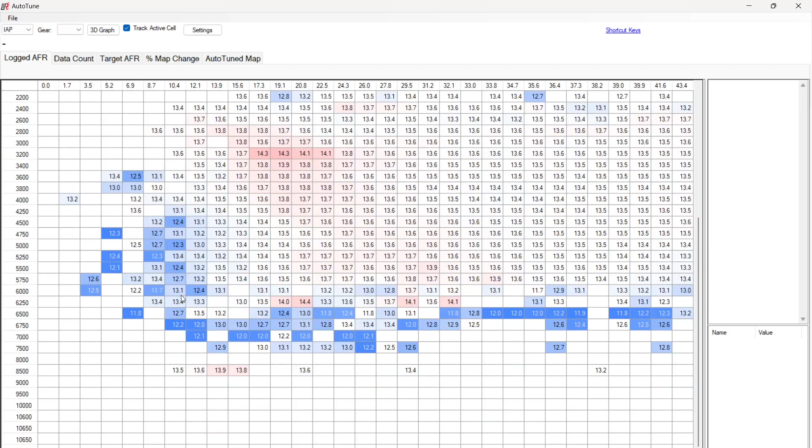That was one of the other things that prompted me to make the video, and I completely forgot about it. If I look at the percentage map change, it's doing a 9% change, 9% change, 9% change. Hang on a minute, I've got it set to a maximum of 6. So how come it's doing 9?

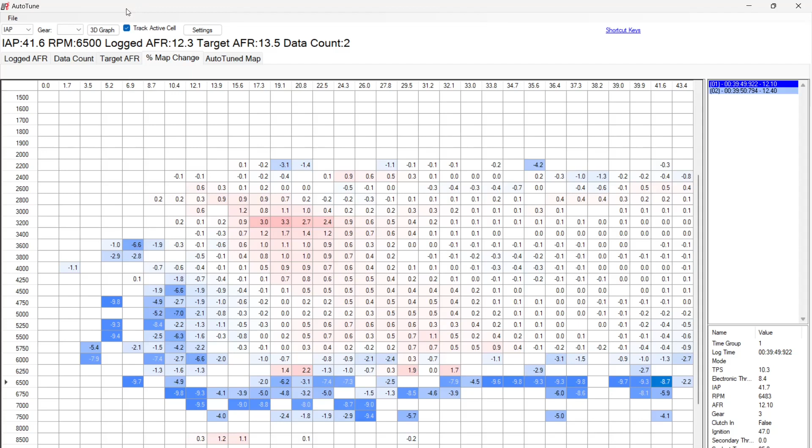That was one of the things they did, they just bodged all of the settings. So all the settings are gone. Look, neutral filter's gone, clutch in's gone. Apologies. Yeah, deceleration filter's gone too. Smoothing strength, I think I had that down at 5.

That's the thing, I have no idea what I had it at. I know I had this at 11. Let's see, can't remember what I had. Auto-tune strength, I think I had that at 70. Maximum percentage change, I had that at 6.

So yeah, I've had to go back and redo that. I had to do all the, so this one here, you've got to tell it how far away your O2 sensor is, because there's a lag between the different log records. The AFR record doesn't directly match with the record it's logged at, because it takes time for the fuel to go in, the ignition to happen, and the exhaust to actually flow down. Regardless, I had to go and put these settings back in.

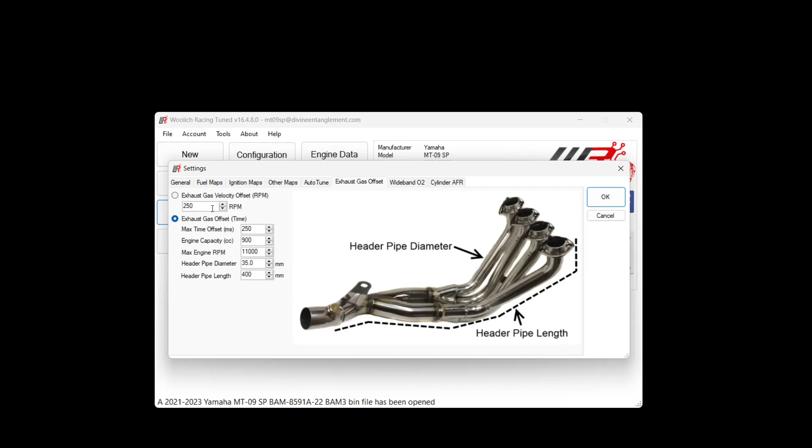Let's see, did I do that before I move on? Yes. Oh, I also did a test to see if I could get power mode in the log file, but yeah, Yamaha just didn't show it up at all.

Let's just see all of that. Don't think I have to worry about that. Oh actually, that could be handy - compare bin file, current bin file. I have to figure out how to use that. Although it is handy to see how far you get from stock, but when I really lock one in, I suppose I'll make that the base one. Anyway, I needed to set that.

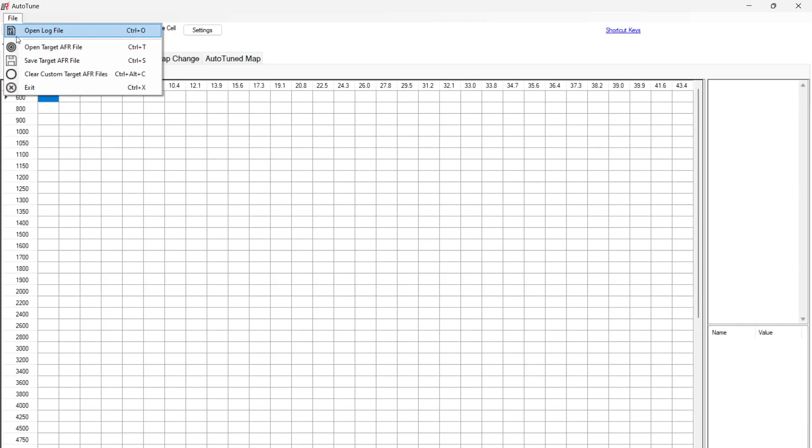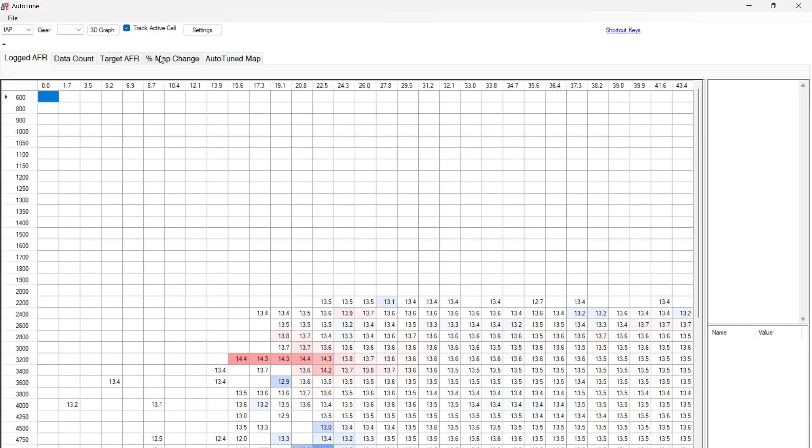Let's come back again, open the log files, and let's see. Hopefully it won't be trying to adjust it by 10%. So yeah, maximum 6%. So obviously some of those filters could have all been in the deceleration areas and whatnot.

So you've got to pay attention. If I wasn't paying attention on it updating, I wouldn't have known that the settings had been wiped. So that's something to be quite cautious of - it would have done a lot of updates that I never actually wanted applied.

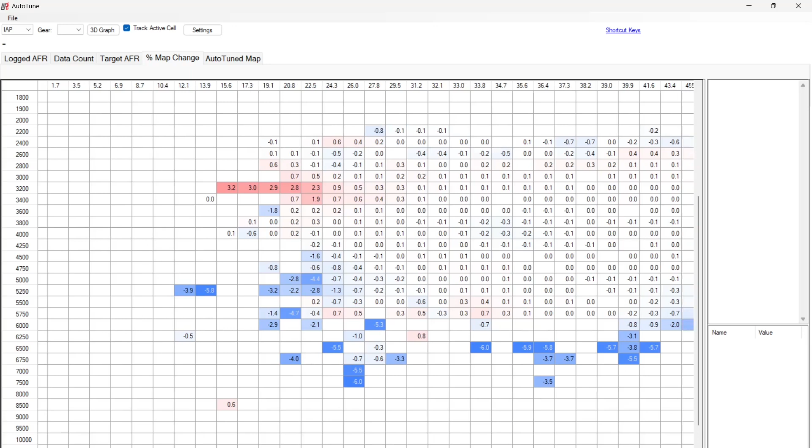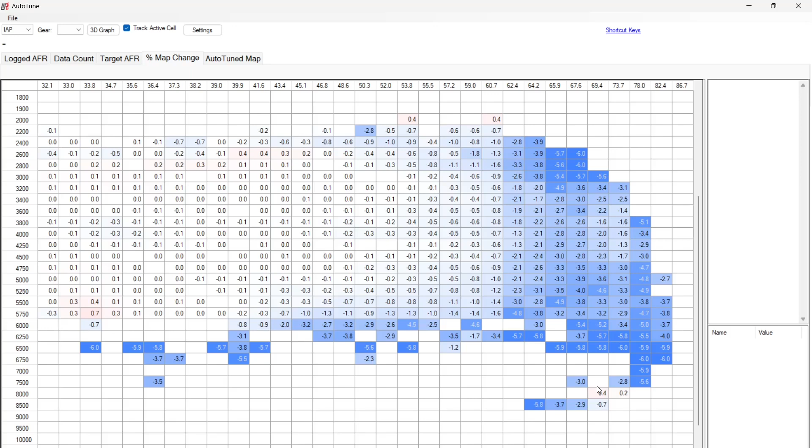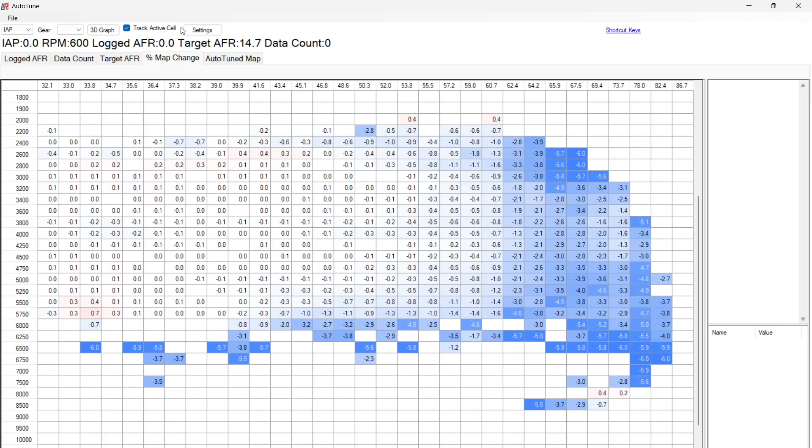And this here is extreme engine braking. Actually, I should probably - I think I'll put in another filter to take that out. So let's see, go to the Autotune map just to see what the values would be.

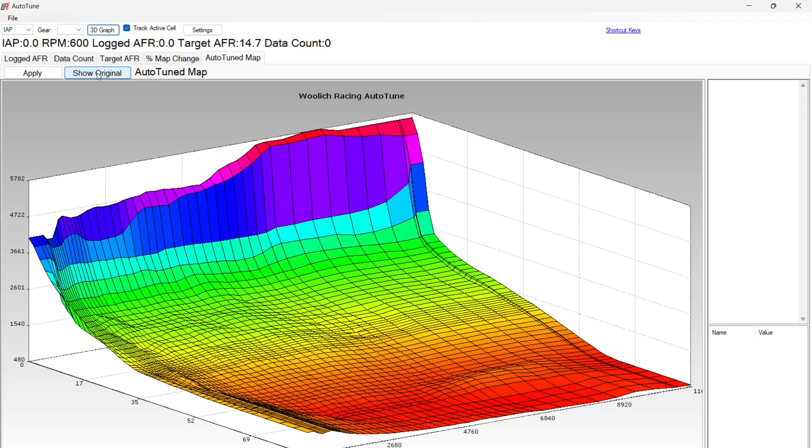So yeah, because that's a pretty dramatic change. Let's have a look at the 3D graph. So that's what it was, that's what it is. Not really comfortable with some of these changes, because that is actually leaning it out quite a lot, particularly at these higher revs. Well, not really - oh yeah, I suppose it is, relatively speaking.

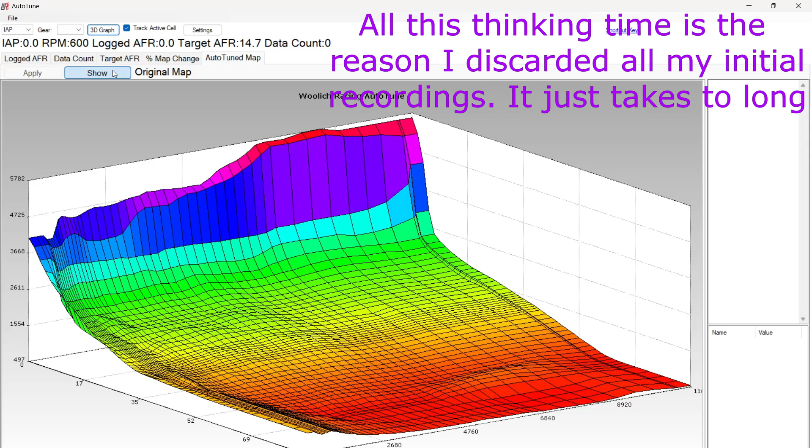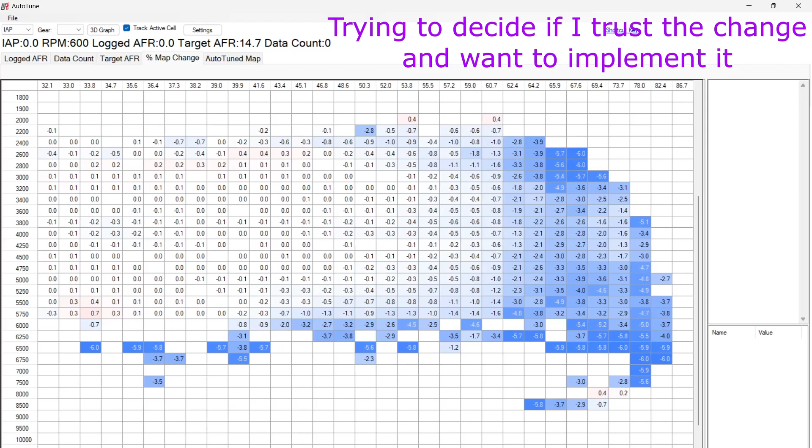Yeah, let's see. So if we come back to that, we're talking, I suppose, this area here. How many data records have we got? Not many, not many, not many.

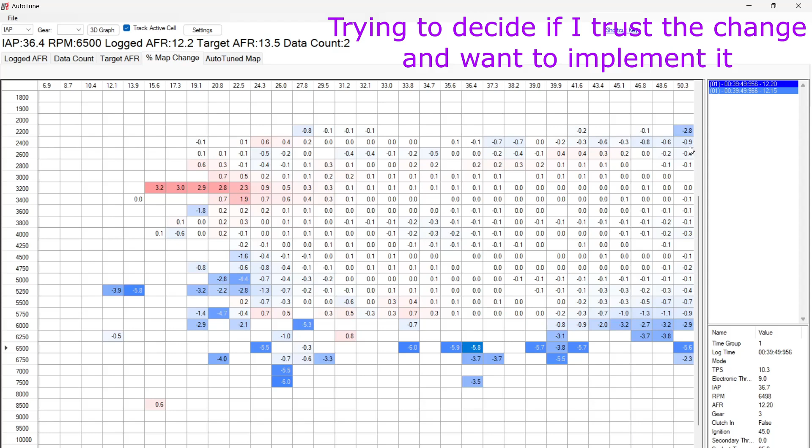I'm going to go back to the settings. I'm going to change this up, minimum cell data logs. Let's put this back to 10 - well, not back to 10, let's put it up to 10 and see what we get.

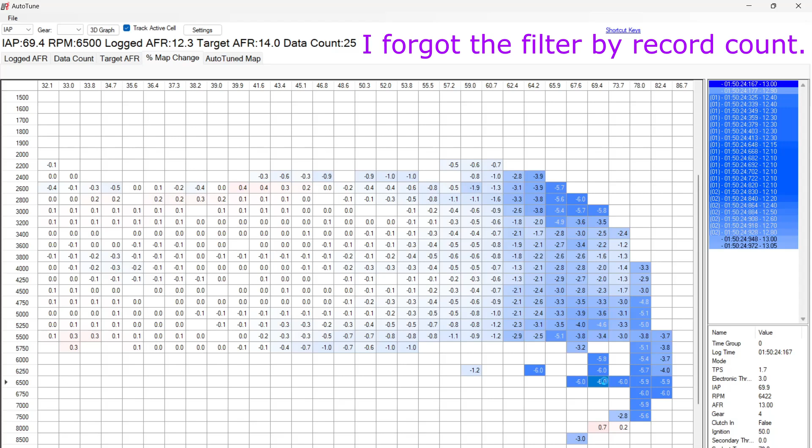And it's just completely taken them out. And that is a lot of engine braking. I won't actually mess with this. So I'll copy it up to 60.7.

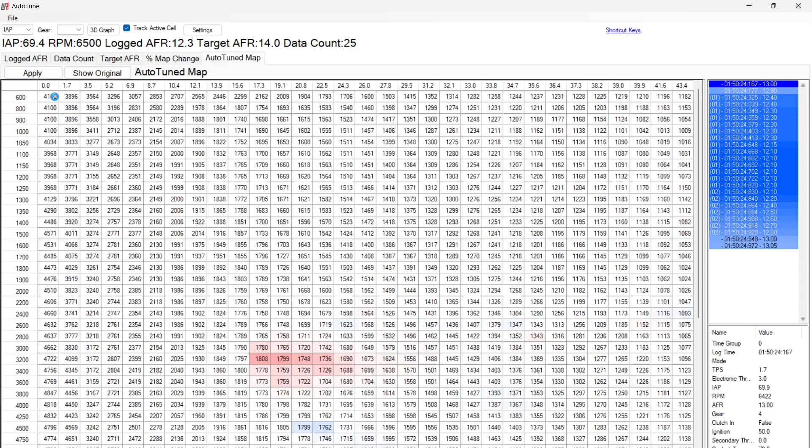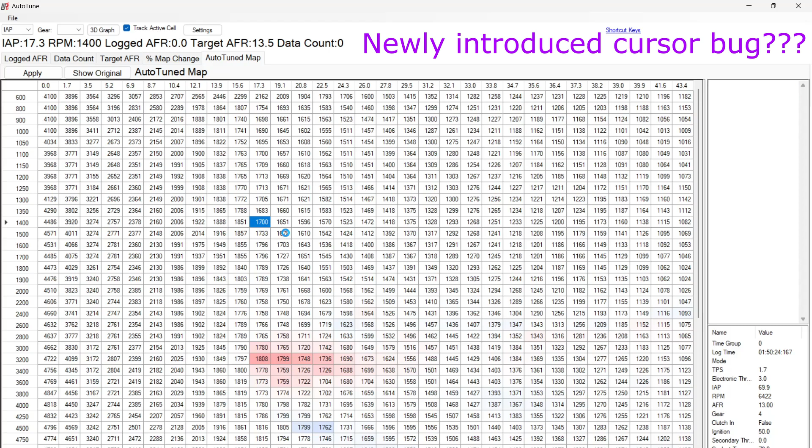So if I go this - okay, it's trying to load. Come on, hurry up. What is it trying to do? It's mixed up.

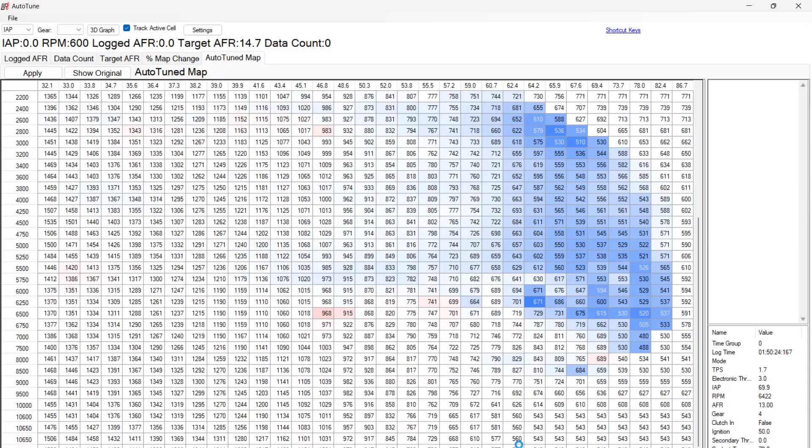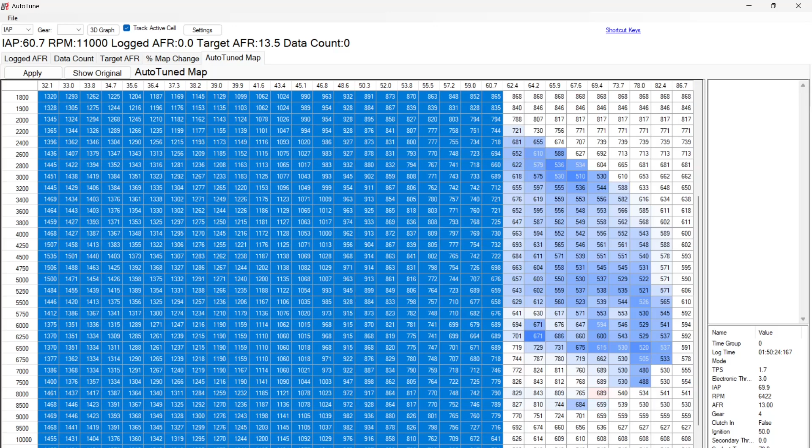Yeah, so I think I'll leave it at just there, because the other thing - I do have it set up for the popping and stuff, which would actually potentially fall into a couple of zones here, probably not down here. But regardless, here I might actually add a filtering section for that.

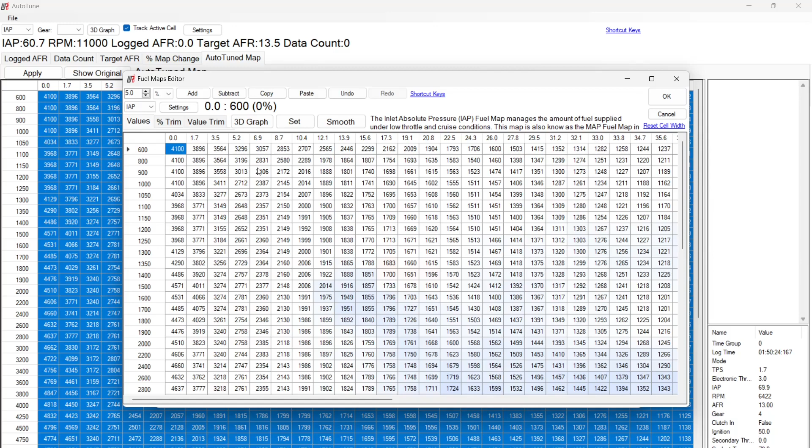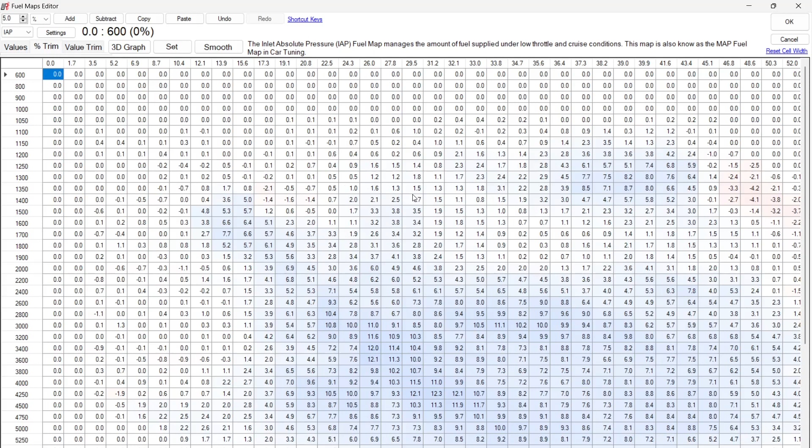Anyway, I selected this from this top corner, so that's where I'll paste it in on the fuel map. So if I go fuel map, IAP, and yeah, let's have a look at what we have overall. Is, yeah, it's not that dramatic, relatively speaking.

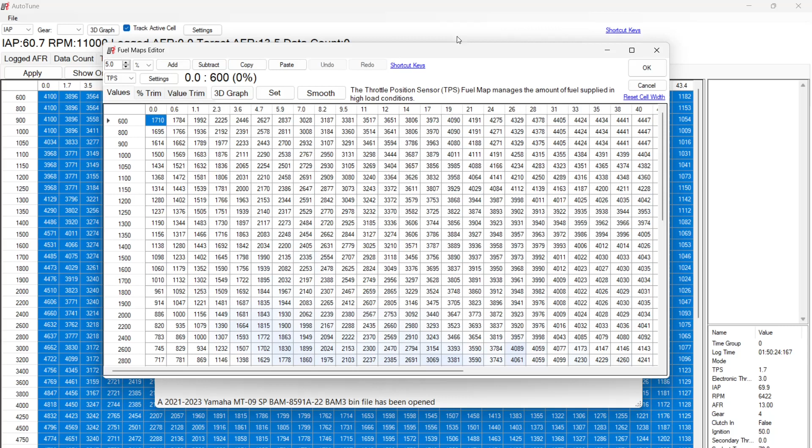So anyway, I'm going to okay that, just open it up fresh because I presume that's sort of locked in. Okay, go to TPS, over here we'll go to TPS. Okay, it's got a few records there. That's been a bit lean, so it's trying to rich it out.

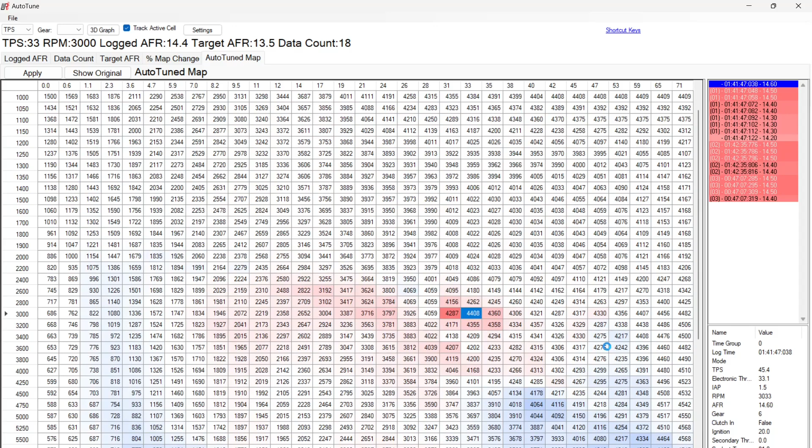Okay, just have a look at the graph and we'll see where we were. I don't know, you got to trust it. This is where it's sort of a bit quirky. And it's interesting that, yeah, some of these are actually, like this whole area here is actually going up higher. This whole area here is going up higher. Part of this maybe is just not going anywhere.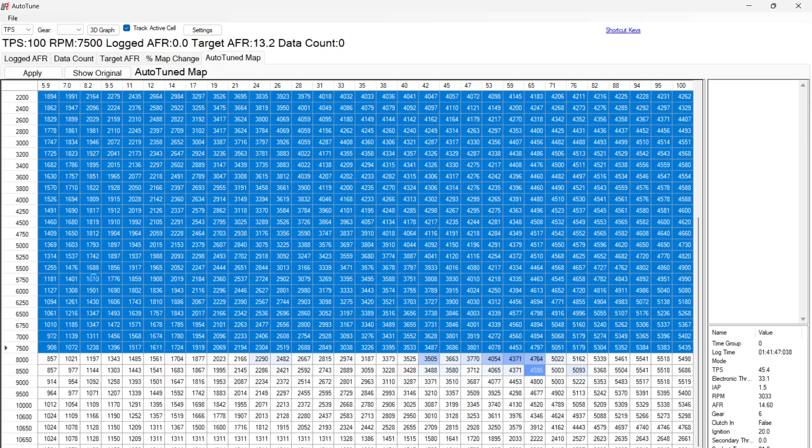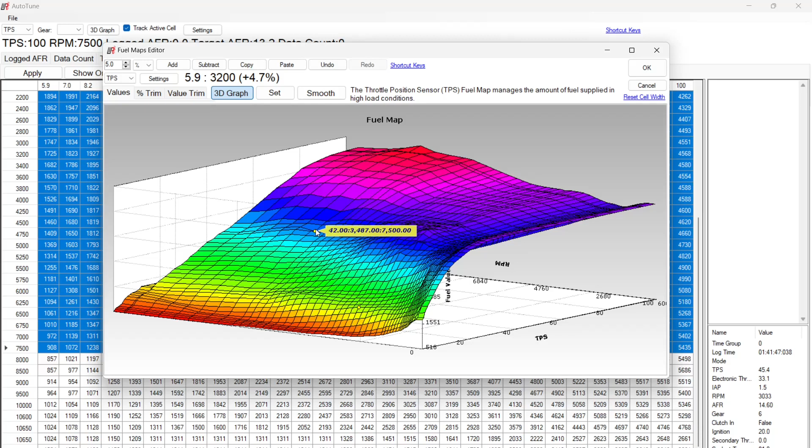Okay, so we have the fuel map. I grabbed it from the corner on TPS. Okay, let's have a look at our graph. Yeah, it does have a hole in it there. It's at 42, 7.5. So 42.

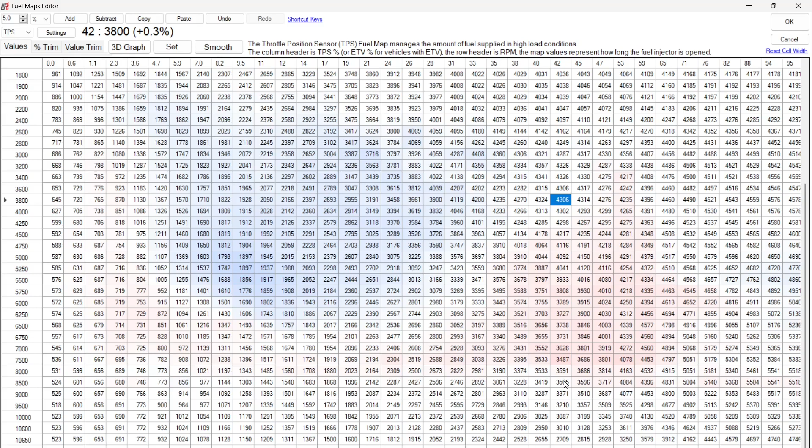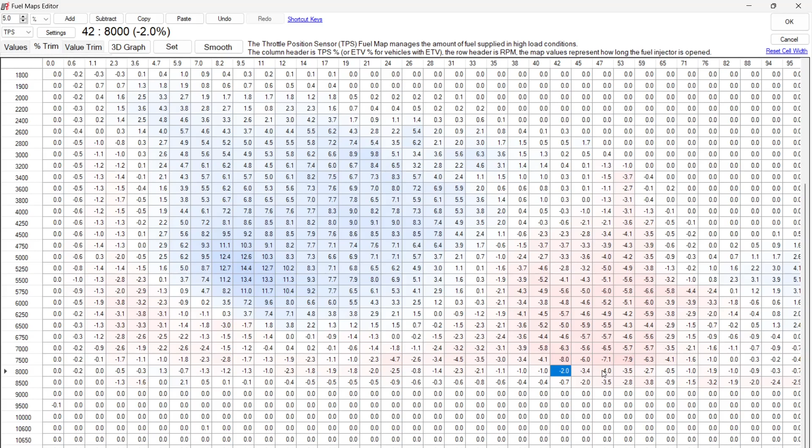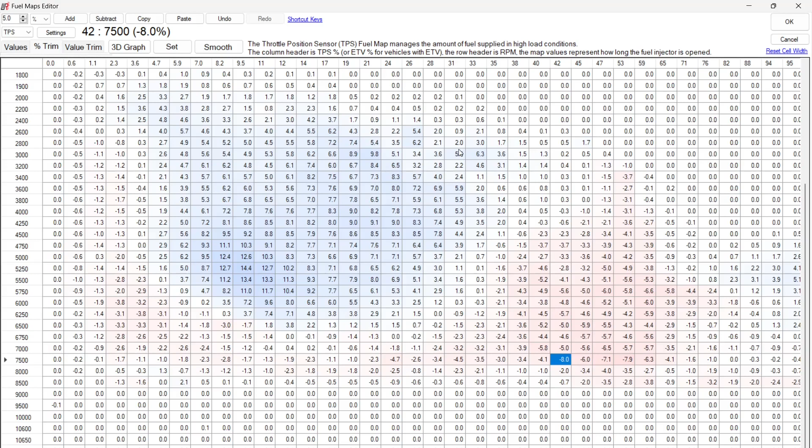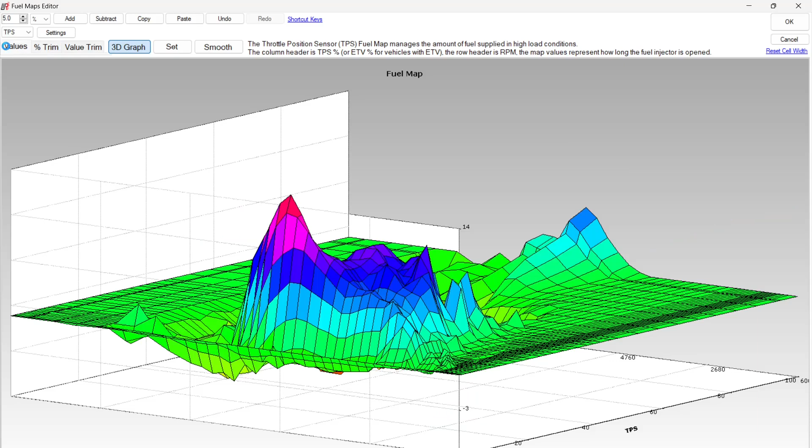Let's see what we've got percentage wise. That one. Yeah, I'm going to take that out, or at least I'll make this -5. Well, actually, set -5. I'll set this to -5. And yeah, that spot's not as bad.

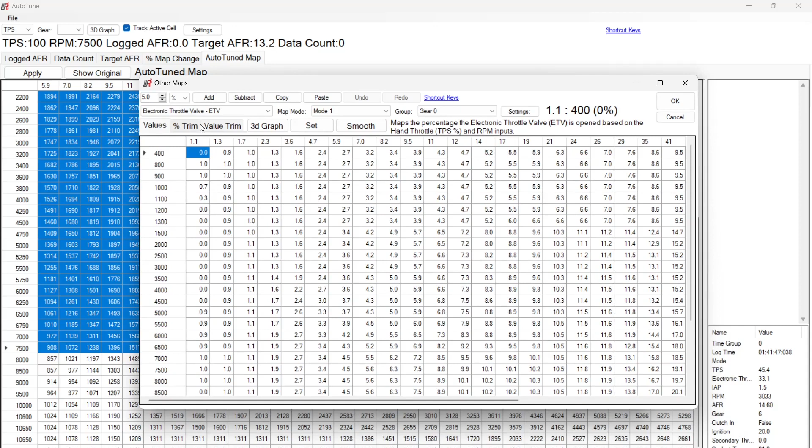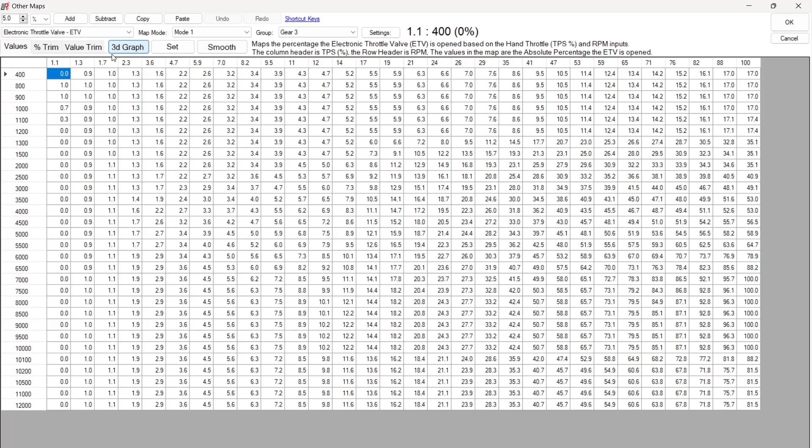Okay, another change I made was with respect to the throttle valve maps. So if we have a look at these, for mode 1, if we have a look at third, because I didn't touch this, you can see it's quite sort of very sharp. It's got its little dip there, and yeah, it's got a very sort of significant inset there.

So if I go to 4, I made a slight change on that, so I sort of smoothed it out, made it a lot smoother.

And yeah, if I go back to this one, so it's sort of, you open the, even if you crank the throttle all the way up, you say you're down here, you're sort of cruising. What do we got? We're at, you know, okay, let's say we're at, yeah, 3000 RPM, and you just crack the throttle open 100%. So you'd be down here, you crack the throttle open 100%, and it's really just going to put you here, and then you're going to wait until the revs go, and you're going to wait a bit more, and wait a bit more, and wait a bit more, and then you're going to get your rush. And it's like, what on earth are you doing? You know, this is mode 1, and it just, so this is why suddenly you get that whoosh, and everyone goes, oh, it's got so much, you don't get anything until you get to the higher revs. That's because it's not giving you any throttle until you get to 5,500 RPM.

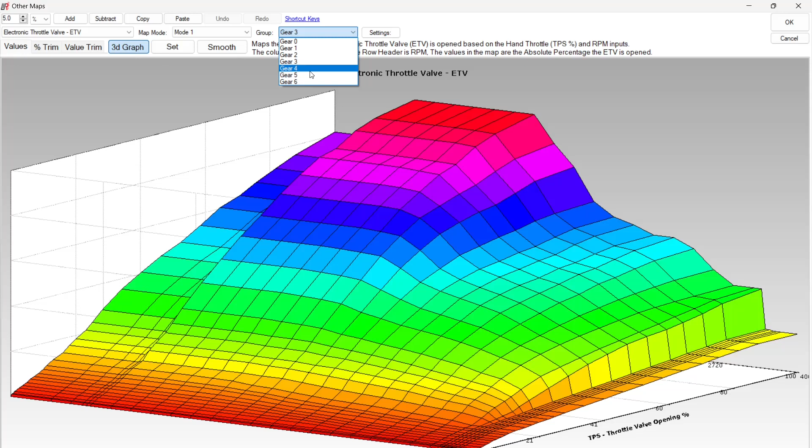So that's probably all right in the lower gears, because you know you ended up wheeling it or whatever. But in the higher gears, there's sort of no reason to be that restrictive. So for gear 4, I sort of smoothed out this bit here. Gear 5 even more so, and gear 6 I think is the same as gear 5. Oh no, gear 6 I let it just, yeah, gave a little bit more on the rev limiter. So I just backfilled this bit at the back, you can see.

But went out and riding this, yeah, it's very smooth. You crack the throttle open in 5th and 6th gear from about 80 kilometers an hour, and you just hold it wide open, and it's so much more smoother the way the power comes on. So, you know, you're not actually, the flow isn't this, and the flow isn't this.

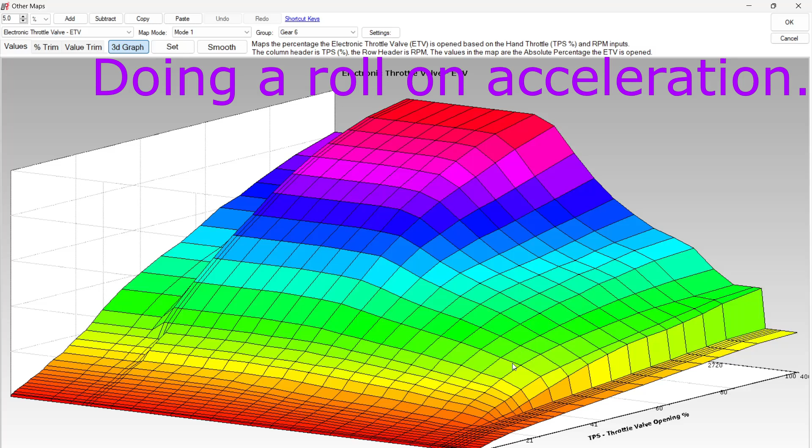It's actually the combination. The flow is this direction, because of course you are accelerating, and as you accelerate, even though you've got 100% throttle, or you sort of wind it on, this is your smoothness. As you open it up more and more and more, it'll come this way. Yes, you can crack it right open, and that just sends it all the way up here for it to go along this way. But yeah, it's not really.

Yeah, how do you put it? It is what it is. How did I do that in the Woolich stuff?

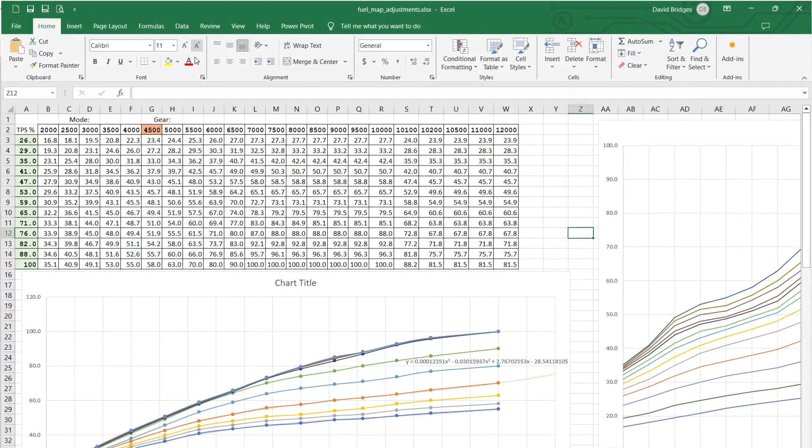Well, I didn't. So what I did do, I copied the relevant section into Excel, and I spent a very tedious amount of time graphing it, graphing it this way - two ways actually.

So one is per chart. Effectively, each of these is vertically relative to the throttle position sensor. This might be third gear, can't remember. Ultimately this one here is the 4,000 RPM band, this one here is the 6,500 RPM band. So in here, that is the equivalent of this one, 6,500. That is this flow and how smooth it is.

But the other graph is actually this one, so it's how much - that's the thing. I've graphed both of these axes. This one here is coming from low throttle position to high throttle position, and this one here is going from low revs to high revs.

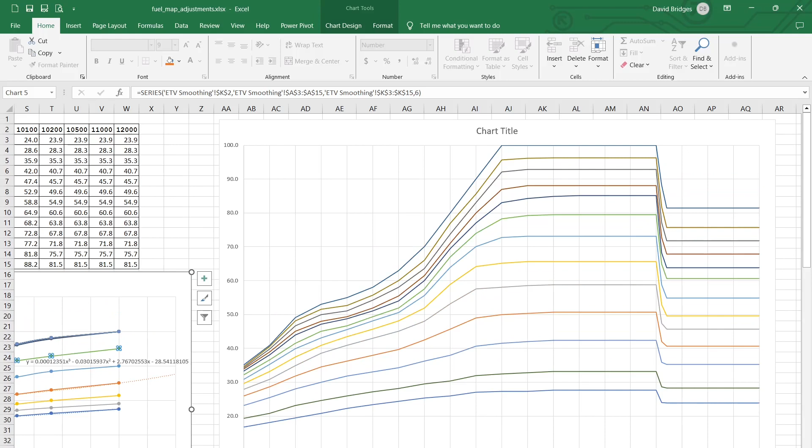What I was doing was basically making - oh, previously the original ones were just very much chopped in here and then went up, and it was really ragged. So I just made this a lot smoother. Of course, this is fourth gear.

So these are the adjustments to fourth gear, and I smoothed this out too. I put in the trend line, worked out the formula for it, just so I could get a feel for what I was looking at.

And came in and made sure that any sort of dips that were in it this way were removed. Came here, reduced this quite a lot, and at the end came out with a nice balanced and much smoother result, which of course you can see here.

If you go from that to that, this one's very sharp angled, and it's got this dip in it here at 10,000 RPM before it gives you full throttle. So yeah, that's a big part of it.

Now, but of course you come to this, and it's a lot smoother in each direction. And as per usual, I'm not mucking around with how it is down here.

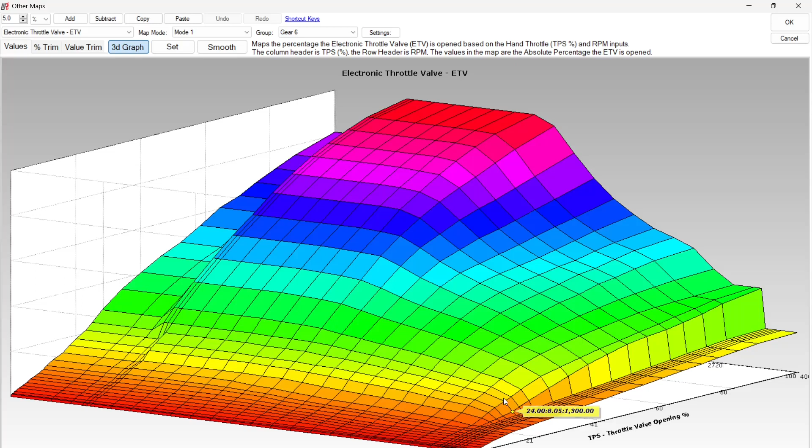Now another thing is my O2 sensor delete didn't quite work as well as I wanted it to. I think the trick is going to be when I pull the wideband O2 sensor out and stick the stock one back in. I've got some plugs on order, some connectors on order, so I'll wire up one where I can hook up a meter to the output and actually look at what the stock O2 sensor is outputting, so I can generate a more consistent input that the ECU is happy with.

I took a wild guess at the half voltage mark and aimed for that, but I'm not quite sure that was necessarily correct. And since it's passive components, I might have to put some active components in or make it adjustable. When I say active, I mean stick a voltage regulator in there, so I've got a controlled value that I then divide rather than just dividing by the battery alternator voltage, which can fluctuate.

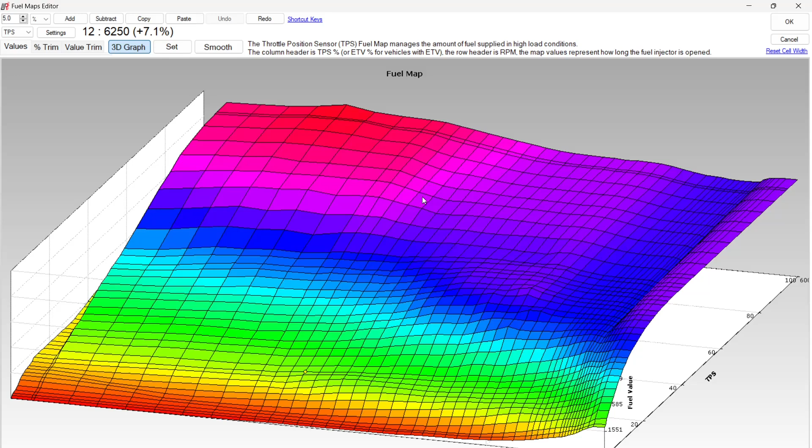The other thing too is that these are the first few maps I've done after identifying the bug in the ETV. The first logs I applied in the last video were actually just from basically freeway riding, so there wasn't much there - just fifth and sixth gear, cruising at highway speeds. Today's ones were more of the first logs that actually involved twisties riding.

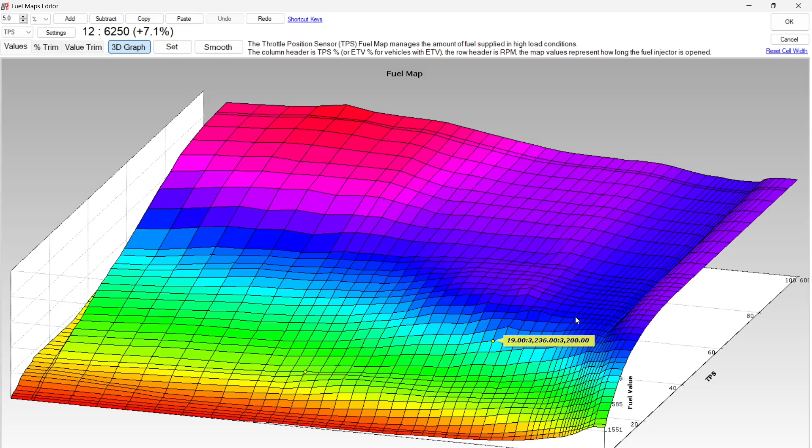I'll have to collect a few more of those and hopefully flesh that out. Anyway, that's it, and I'll close all this up and save that file off.

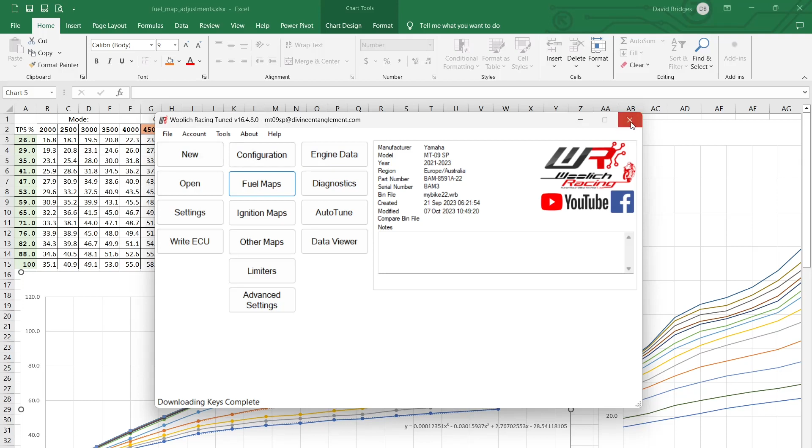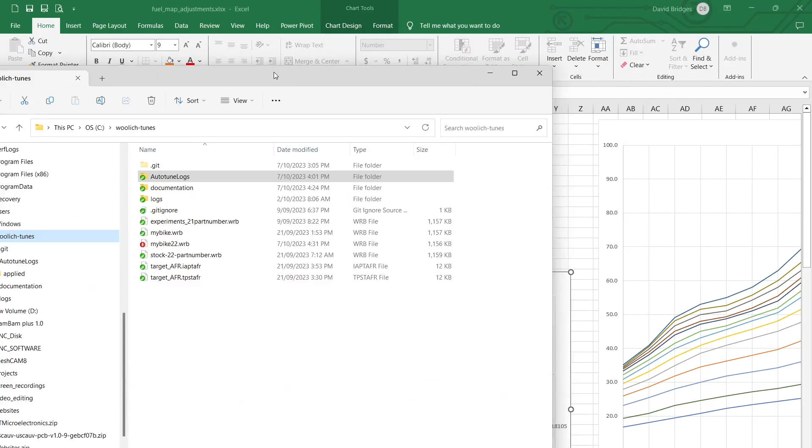Yes, I want to save it, so I'm going to do that. Got it, now we want to commit it.

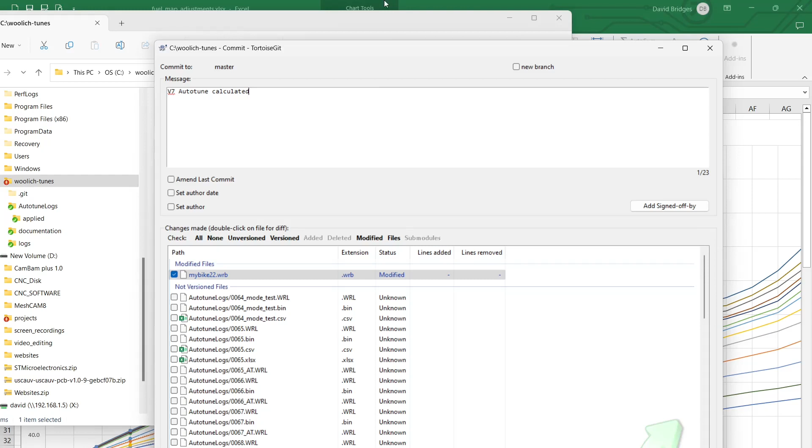So V7 auto-tune calculated, and we are right to go.

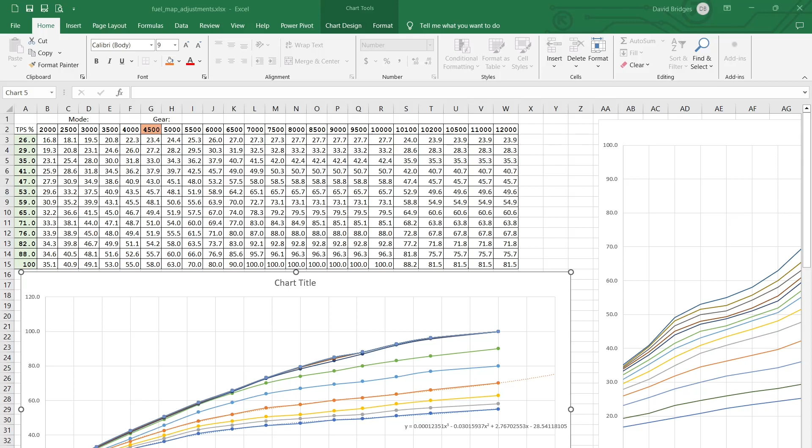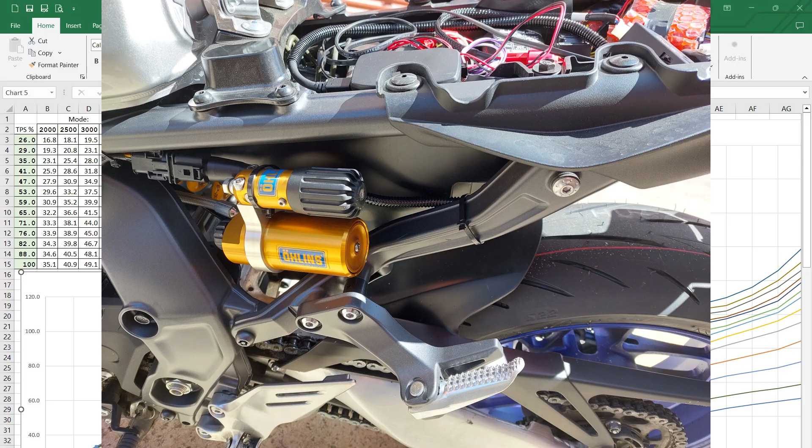Okay, thanks a lot. I suppose these - oh, actually I'll edit them in later. But I do have some footage of how the wideband sensor is installed, so it'd be good to get that in.